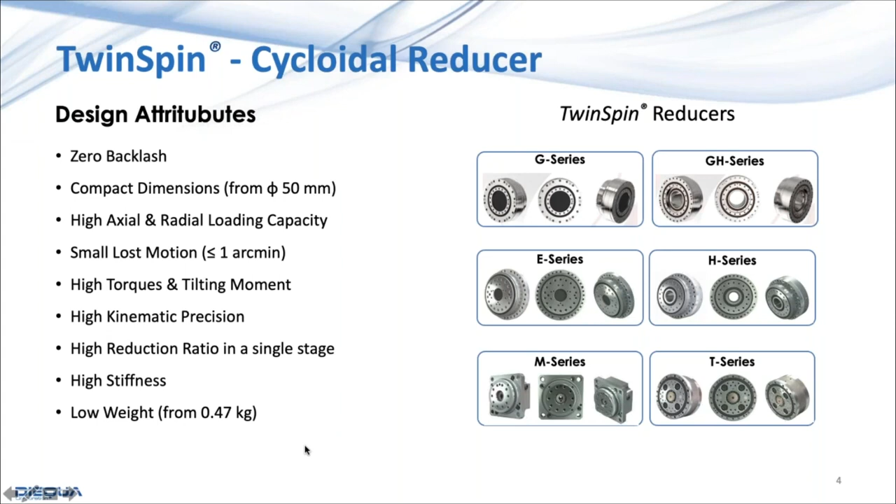And if we take a look at just a quick summary of the various solutions, we can see what their configurations look like. Their typical sizes range anywhere from a 50 millimeter up through a 225, and torque capacities in a series, again, starting at about 18 Newton meters and running to almost 3,000 Newton meters of nominal torque. And as we look at the ratios, because all of these reducers are single stage designs, they are considered to have a very high reduction ratio in a small, compact solution.

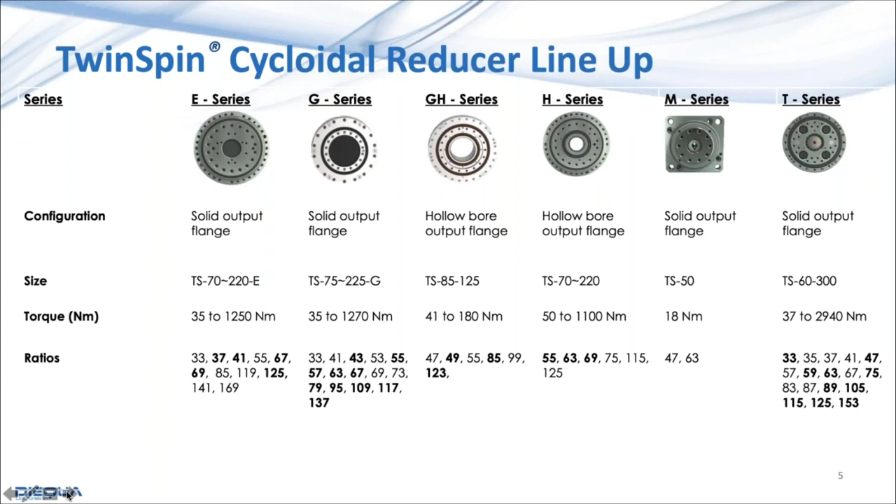When we think about the applications that these are typically applied within, and we look at the areas that DIEQUA has had the opportunity to assist customers in, certainly in general automation, medical robotics and systems, as well as packaging system and design, but on a broader scale, in machine tool metalworking, because the reducers provide zero backlash and low lost motion, they're well suited for very high demand position and support type applications.

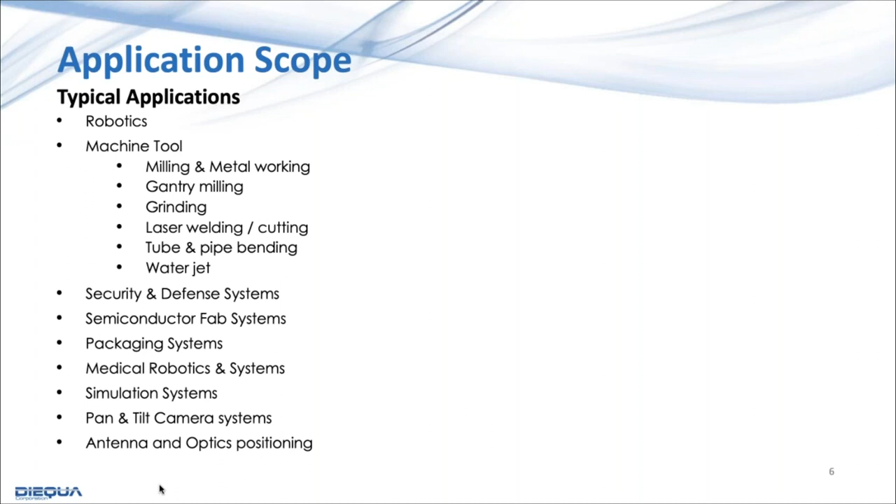Additionally, in applications where people might also need higher fidelity or a more crisp and abrupt response, such as in simulation, flight simulation, or driving simulation systems, the cycloidals have the ability to have a low inertia input, which permits them to provide a very crisp and responsive output.

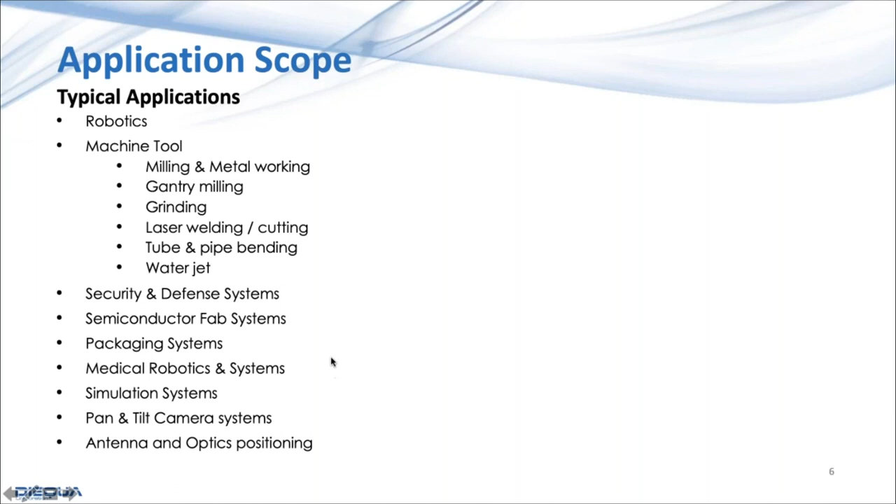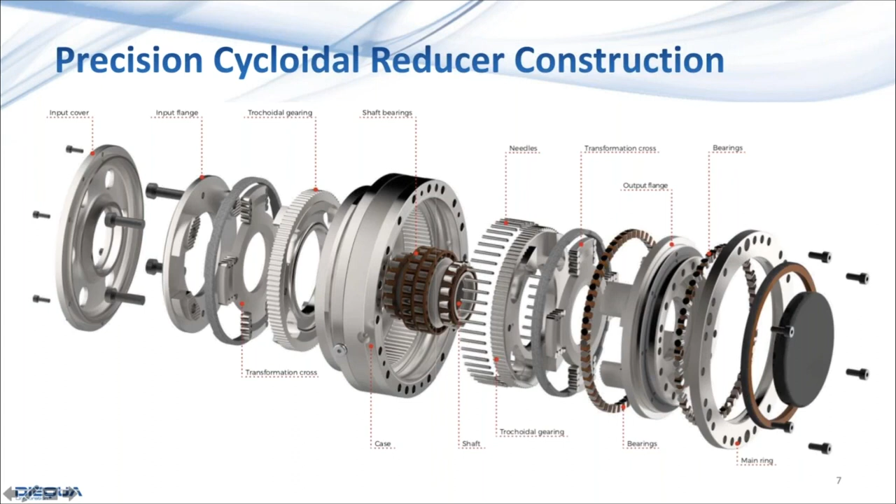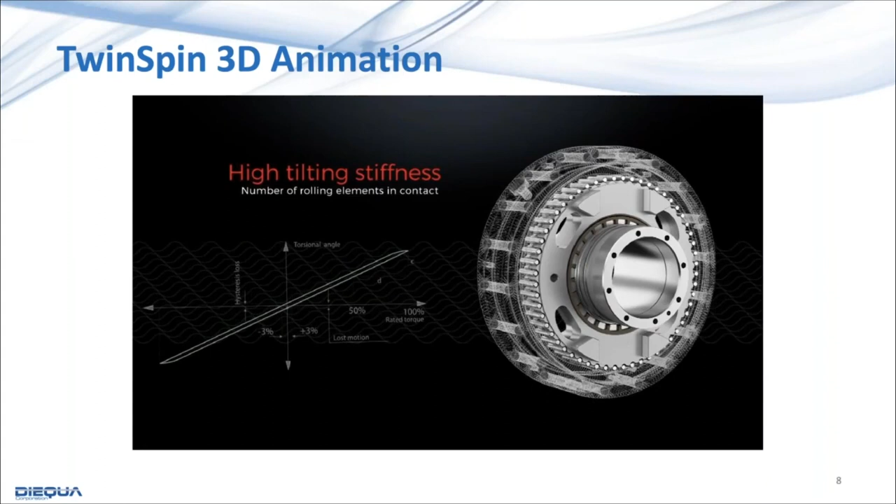This video that I'm going to be sharing shows an animation vignette of the actual construction of the reducer, and you will see. Sorry, there we go. You'll actually see as we deconstruct the unit how all of the elements roll in integration with each other, and we can see the cycloidal wheel being driven by the eccentric cam as it walks against, over, and around those needle rollers. Again, never losing touch with them.

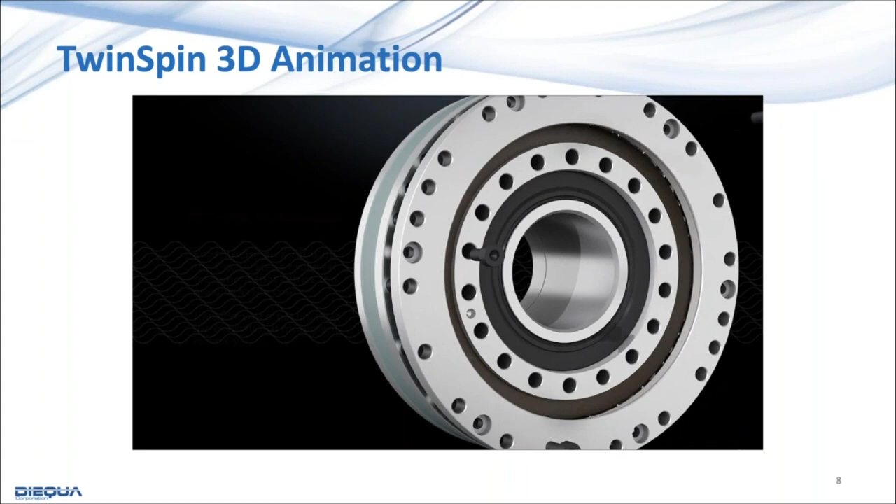We are in a torque generation mode roughly 50% of the time. The design element that just came in is the transformation cross, and you'll see the roller bearings that isolate the cycloidal wheel's oscillating or planetary movement to provide pure, smooth, even transmission of torque from the reducer.

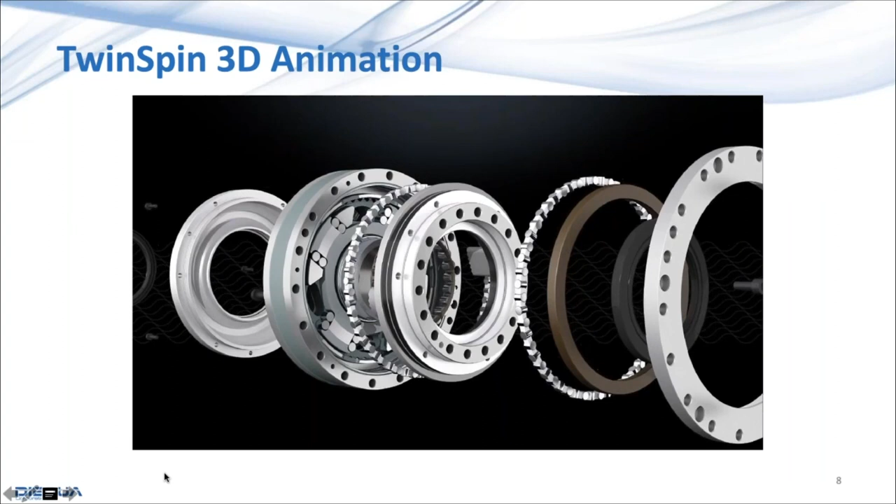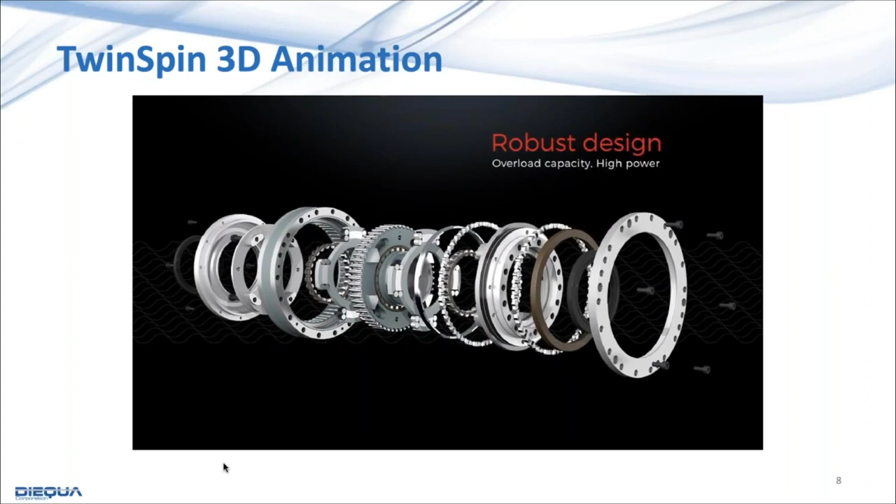In all of the TwinSpin systems, they all employ this similar twin cycloidal wheel solution, utilizing the low diameter high-speed input shaft, so we have a crisp, robust motion control solution.

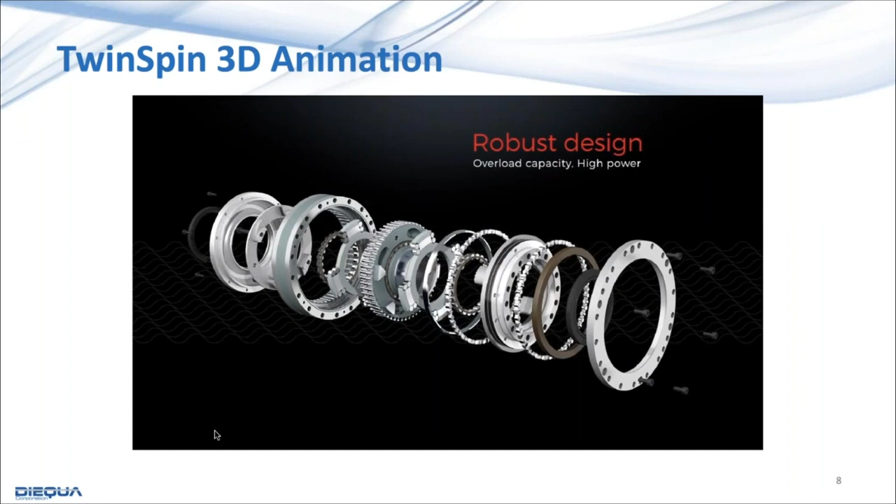I previously mentioned a little bit about the difference in construction solution as it relates to translating rotational movement from the motor to the output shaft. And on the left, you see the TwinSpin reducer as it's moving against its internal componentry, again, never losing contact with those needle rollers.

When we look at a strain wave or a flex spline, by the nature of the system, it's actually utilizing a flexible cup to deform, the wave generator to deform the flexible cup and engage that rigid spline, relying on shear strength as compared to compressive strength. The TwinSpin solutions, again, higher torque generation capability.

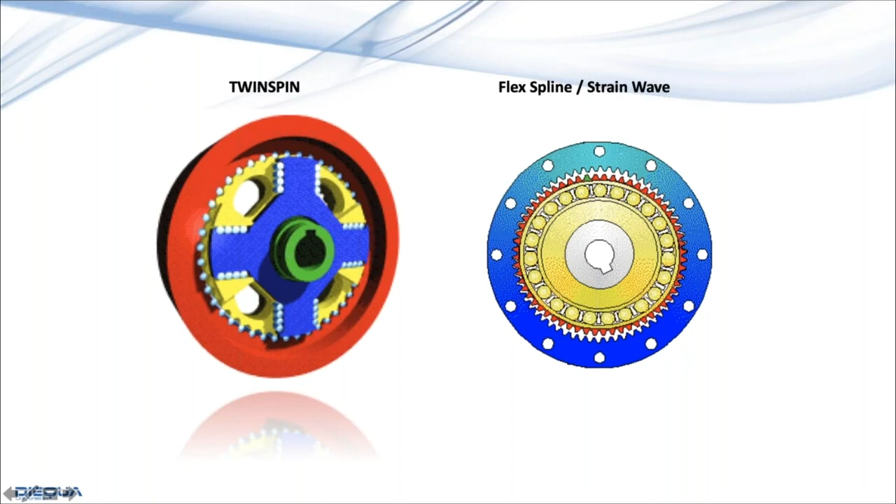I mentioned that I have a short, quick video. This is a TwinSpin reducer where the output flange has been removed and replaced with an acrylic cover. So you'll be able to visualize the actual movement of the cycloidal wheel against the needle rollers. And you can see how contact is maintained in that design.

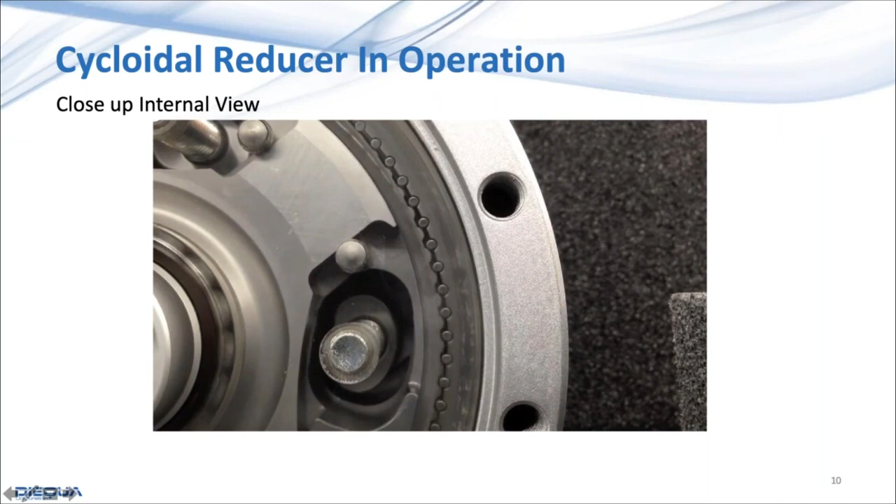One of the questions that we frequently field is the accuracy between the input shaft and the output flange of the reducer. While the reducers are all considered zero backlash solutions, there is a theoretical variation between input to output. This ATE, or angular transmission error, is considered to be very, very small.

And as you can see by this graphic, moving in one direction, we actually have a variance as low as 34 arc seconds. Very low, very high precision is typically what customers can anticipate from the TwinSpin reducer.

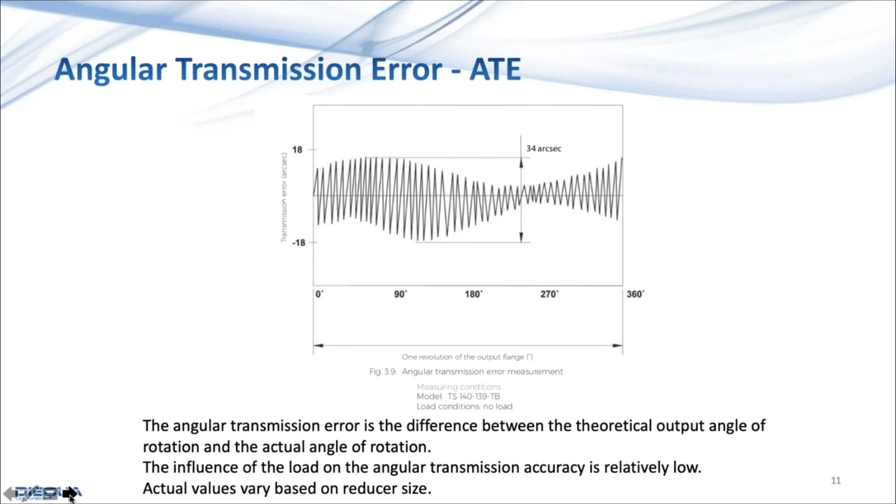Another question that we frequently are called upon to respond to is the efficiency of the TwinSpin product. While the unit starts out initially, before it gets through eliminating any high spots, it starts at about a 70% efficiency, and then once achieving operational condition, reaches about an 80 to 85% efficiency.

Things that affect this, whenever we're looking at the selection or the identification of an appropriate solution, we will be looking at all of the mechanical loading. What forces might the shaft be seeing from a moment load, radial, or axial? The amount of torque that the reducer is going to produce. So we work very closely with the customer, understanding the motion application, the motion profile, the duty cycles, then the mechanical considerations. We see the highest efficiency when we are utilizing the majority of the reducer.

So we generally look at lubrication viscosity, load characteristics, what might the duty cycle look like? And we optimize the selection to complement the expectation from the customer's design.

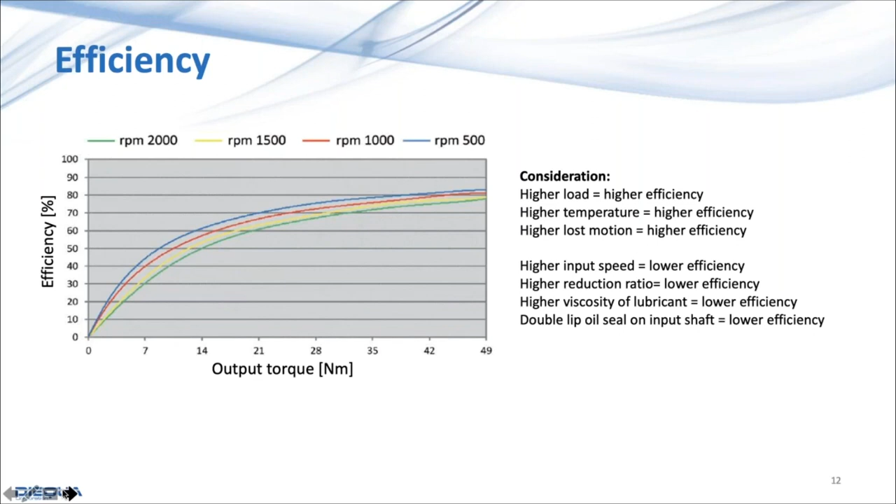Typically, when the selection of a TwinSpin cycloidal is identified as a viable solution for the application, because the reducers are an all-inclusive configuration, no additional bearing support is needed, providing that the application load does not exceed the capacity, it's a given, of the output.

Frequently we're asked, is there an option where the cycloidal reducers are available as a kit? And the answer to that is no. Simply because you have internal componentry that is finished to a 2-micron tolerance in order to deliver that zero backlash configuration. We look at the TwinSpin product as an all-inclusive rather than an a la carte type solution. So we would typically work with the customer to ensure that we've identified the right reducer for the demands of

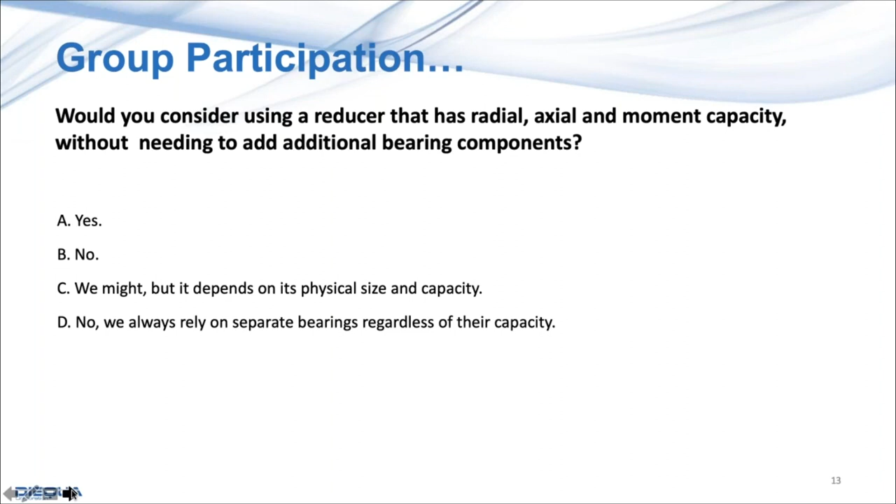When we look at things that can potentially harm or be a detriment to the performance of the reducer, because the technology relies on compressive strength of the cycloidal, it is not inclined to have damage done to the internal componentry. And speaking of that, usually, especially in medical applications, there is usually a factor that the Food and Drug Administration requires of either a times 2 or a times 4 safety margin. The cycloidals are well capable, well suited for delivering those values. Excellent information. Thanks, Tom. Please go ahead. Thank you.

So jumping into some of the applications of these systems, in particular, the tilt and pan type applications that require very crisp performance, zero backlash, and the ability to properly and correctly bring the laser designation or the optical scanning system into proper configuration. Here you can see an internal view of the hollow bore unit here at the base of the actuator. This permits the passage of fiber optics, power, antenna signal information right through the dead center of the reducer with a stationary or static tube.

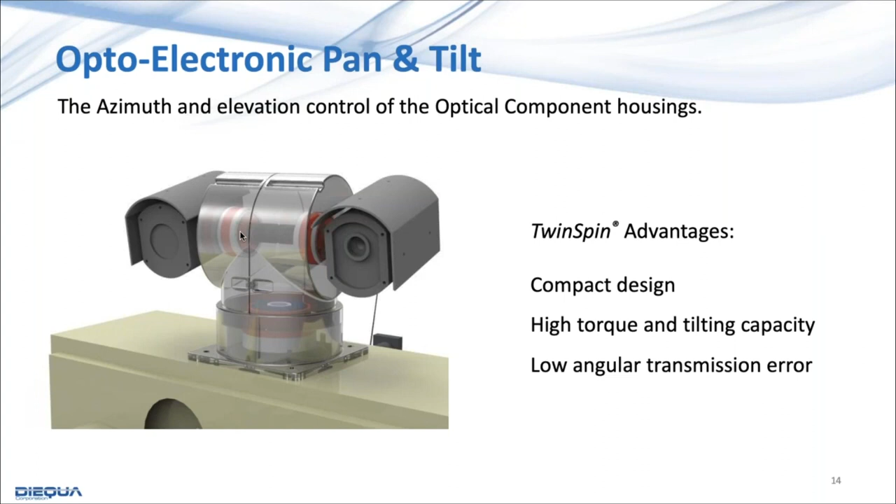And we have a set of TwinSpin reducers, depending on each application, whether the designator or the camera system is moved in parallel or in asynchronous motion, whether it has a single or a dual reducer to support the load. So high torque in a small compact package, and excellent tilting or radial load support capability.

Another application that we get involved with, by the nature of the superior load handling capability of the TwinSpin product, it's incorporated here we see on an AGV for a differential type drive system, where the servo system that runs the AGV or the AMR actually affects steering by changing the speed or the direction of rotation of the right or left reducer. We also have an iteration where in larger systems, we employ both that similar design system, but also incorporate a steering solution. So in larger, say, 10,000 pound type AGVs, rather than a differential design, or if they need to crab or move on a bias direction, they'll employ both fore and aft steering type solutions.

And this is an example of where we will open the tolerance of the cycloidal. We don't need zero backlash when we're interfaced with an AGV or an AMR. So we'll open the backlash up a little bit. This permits us to actually bring the life expectancy to 60 to 65,000 running hours. Typically, we're looking at backlash values where instead of being zero, we're in the 6 to 8 arc minute backlash. Again, higher longevity, the cross roller bearing design gives the TwinSpin product great load handling characteristics.

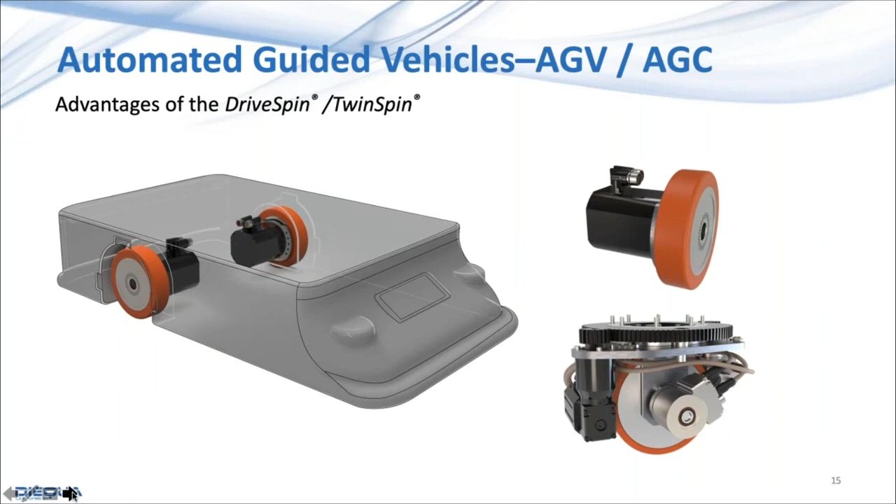When we look at integrating the reducers into the application, generally with the ratios available through the TwinSpin program, they satisfy the majority of the applications that we're called upon to assist with. There are instances, however, where the customer might want a little bit different motor configuration, or may want an even higher reduction than the standard TwinSpin can bring to bear.

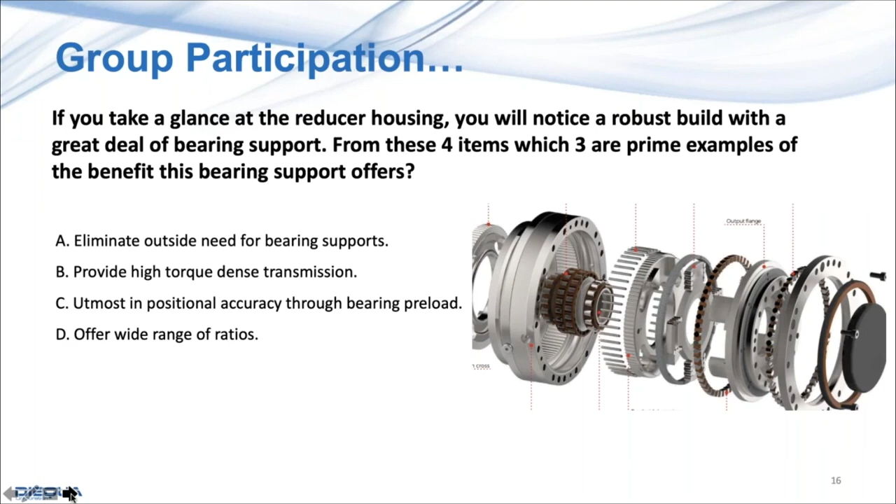but looking at those cross roller bearings that support the output flanges, again, the design intention was to deliver, and when folks look at our specifications, we frequently ensure that they note that the values are rated in kilonewtons rather than newtons. So again, very high load capacity from a very small compact solution. Well done.

So taking a look at a couple of other applications here, looking at the simulation systems, heretofore the typical system employed an electrohydraulic type system, and by utilizing TwinSpin, we're able to eliminate some of the issues that the hydraulic power packs are faced with, but also delivering a more compact, completely electronic and electromechanical solution in a small compact solution.

In the case of surveillance or IED disposal type systems, because of the load capacity, as we've previously discussed, we permit the direct attachment of drive wheels, or in the case of a Caterpillar type track design, the output of the reducer directly supports those loads.

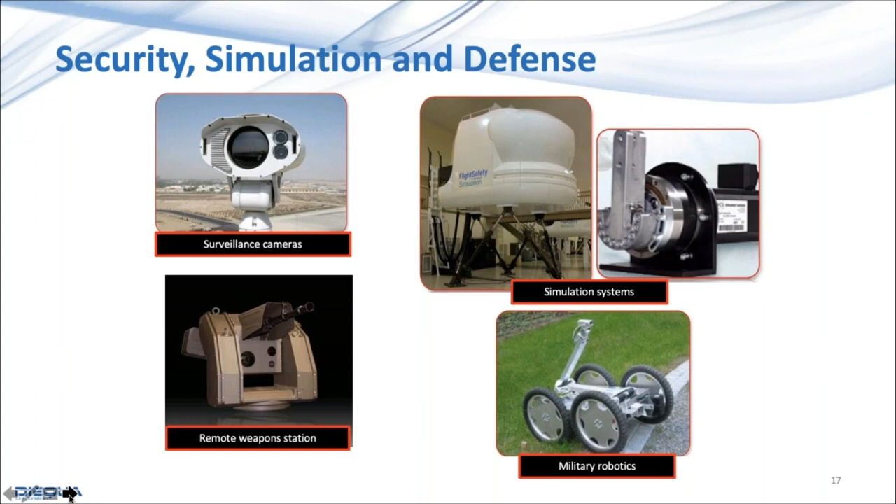When we look at remote weapon systems, in addition to the mass that the reducers would be called upon to support, we also have the ability of addressing the reactive forces that may be present in those systems' design. Again, compact, high fidelity in the ability to respond, low backlash or no backlash in their design. And then in surveillance systems, it's the ability to bring the system to a proper configuration in a small housing with high repeatability.

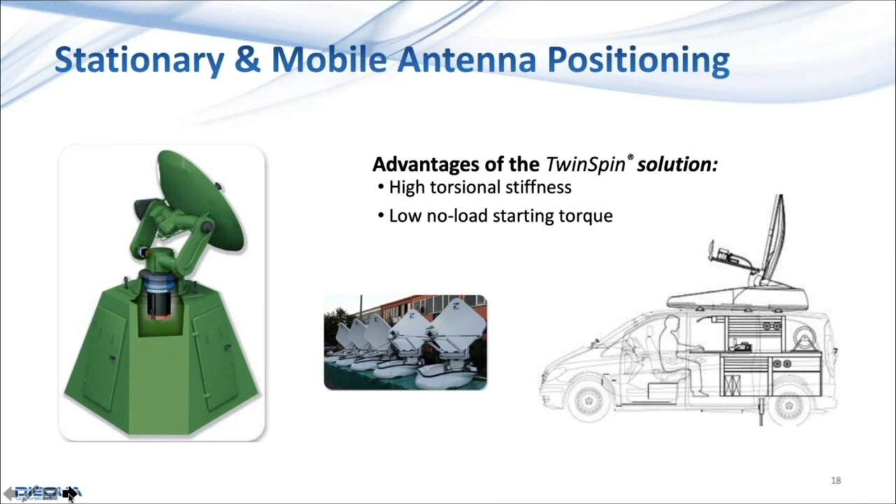Another area that the TwinSpin product excels at has to do in large part with a smaller solution, but now we have, instead of a reactive force, an antenna system which is faced with wind loading issues. So again, high torsional stiffness is one of the key components of its specifications, and its low starting torque capacity brings the ability to position the antennas crisply and very dynamically in a small package.

Another area that we get called upon to support, especially with the miniature cycloidals, is the control and the positioning of azimuth and elevation in the gimbal, as you can see here in the camera system, whether it's camera, visual, infrared, or laser designation, the ability to support the load, and again, high precision, maintained accuracy in a small condensed package.

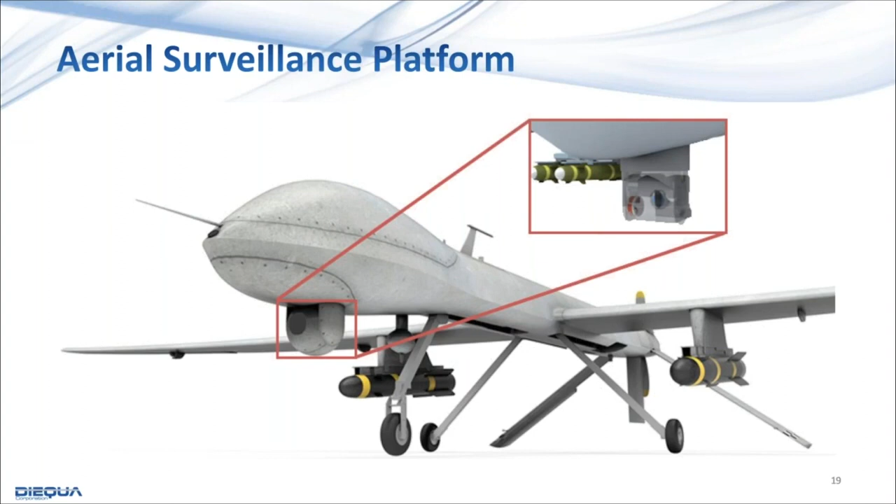Well, let's talk a little bit about lost motion. I don't really know exactly what lost motion is, so maybe you could start by defining that. Certainly.

Frequently, as folks look at the specifications of the cycloidal reducers, there is an inherent functionality at the onset of motion, especially when the reducers are fully loaded, as we recommend, that you have material elasticity that occurs during the onset of movement. I'm sorry, go ahead, excuse me.

So once movement has occurred, and through the movement of the output flange, the material returns to its natural dimension and makes up for that lost motion. But during onset, it is not uncommon to have, and this is typically as low as 1 arc minute of lost motion.

So we're talking about pretty tiny amounts, but that loss can create heat. Is that correct? Or it might need variations in lubrication to make it more efficient?

Yes. So understanding the environment that the application may be called upon to function in, whether it's something that's on the hotter scale, typically north of 40 degrees C, we can adjust the lubrication, but then conversely, we also have applications where the issue of low temperature needs to be taken into consideration. So frequently during the discussion about the application, we explore the storage and then the operational nature of the application that we're going to be called upon.

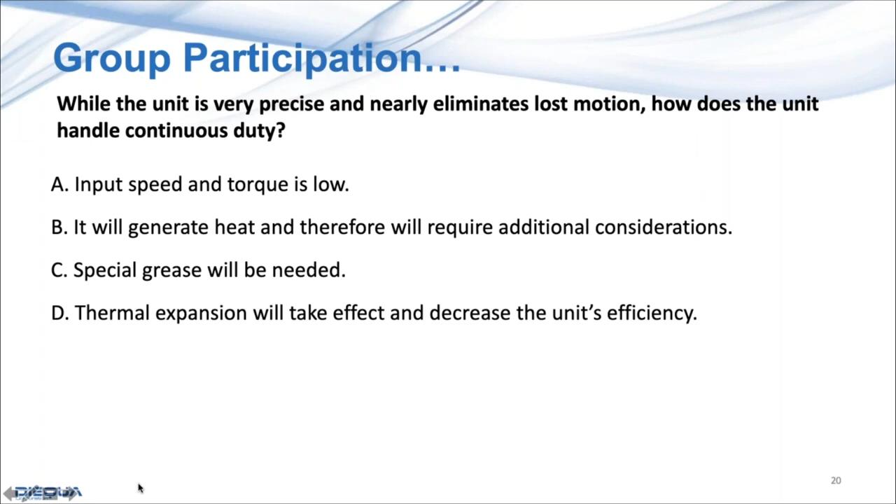Well, thank you. Let's go ahead then. This is great. Thank you.

So taking a look at integrating the servo motors into the reducer, the direct connection infers that the motor shaft has the ability to interface directly to the cycloidal reducer. This typically utilizes a steel motor adapter flange that's attached to the back end of the cycloidal reducer, and the customer's motor shaft would interface directly into the twin spin reducer. This generally delivers the most compact axial solution.

There are instances, though, where the customer's motor shaft can be smaller than the input shaft on the cycloidal. Here we utilize an internal collet, much like your home drill, that constricts around the motor shaft. Again, as small as possible in the axial direction.

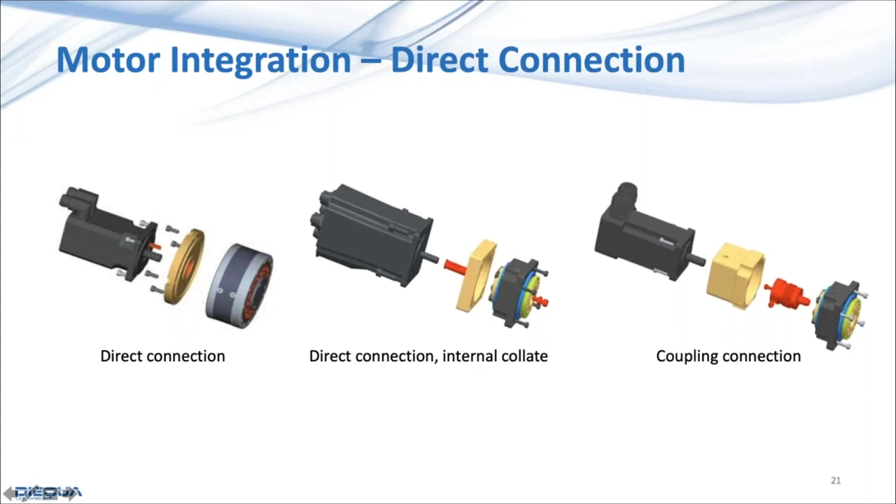However, there are instances where customers' motors, because of other systems on the machine, have a larger diameter. And in that case, we utilize a torsionally rigid steel bellows coupling, an internal collet that interfaces to the input shaft, and then you see that extended adapter that permits the zero backlash coupling to be connected to the system. All three of these are things that we regularly employ in a variety of customer applications.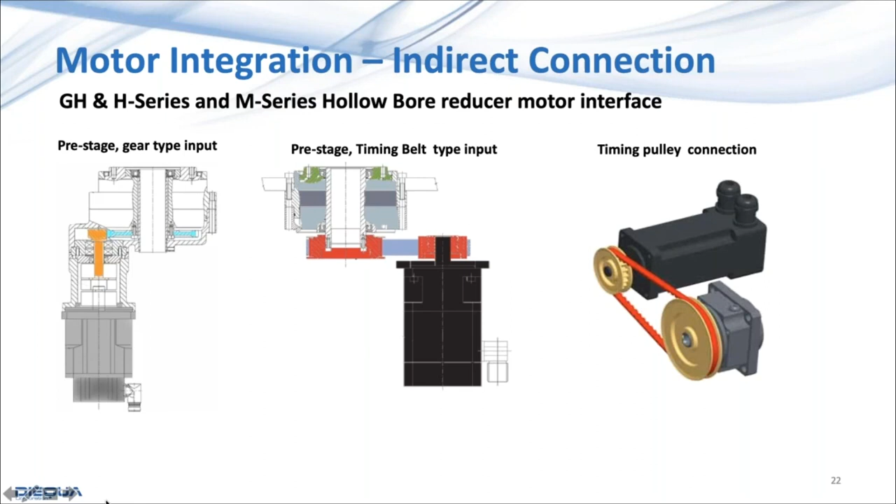You can see here the use of a timing sheave, the pulleys located on both the motor and the reducer, and then a reinforced timing belt, again, keeping the hollow bore unencumbered. And this last configuration, the little miniature twin spin, actually has an 8mm hollow bore, and here we're using a timing pulley and belt configuration. I failed to mention, hollow bore ranges are between 8mm and about 90mm, reducer size dependent, but again, complementing the demands of the application.